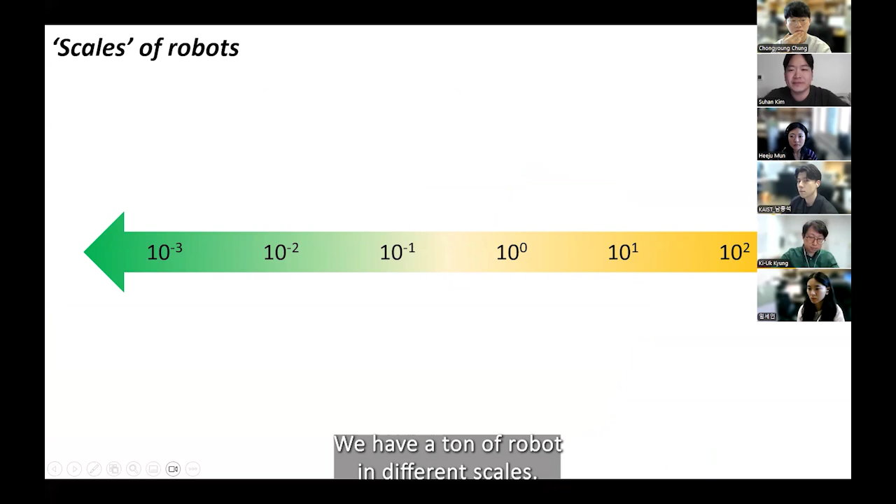I'd like to begin by introducing some different scales of robots. Nowadays, I would say it's like the era of emerging robots, so we have a ton of robots in different scales. For instance, if we see the scale of meters, we can think of robots something like the MIT Cheetah.

The MIT Cheetah robot was developed by Korean professor Sang-bae Kim at MIT, and this is around a one meter robot with four legs that broke the record when it first came out, especially in terms of locomotion speed.

And then if we get to larger sizes, something in the scale of tens of meters, I would say is like airplanes. We don't really usually call them robotic systems, but I think this is a great robot that we use in our daily life, in the length scale of maybe 20 to 40 meters. Since this robot is way larger, it can accommodate way more capacity, especially as a transportation method.

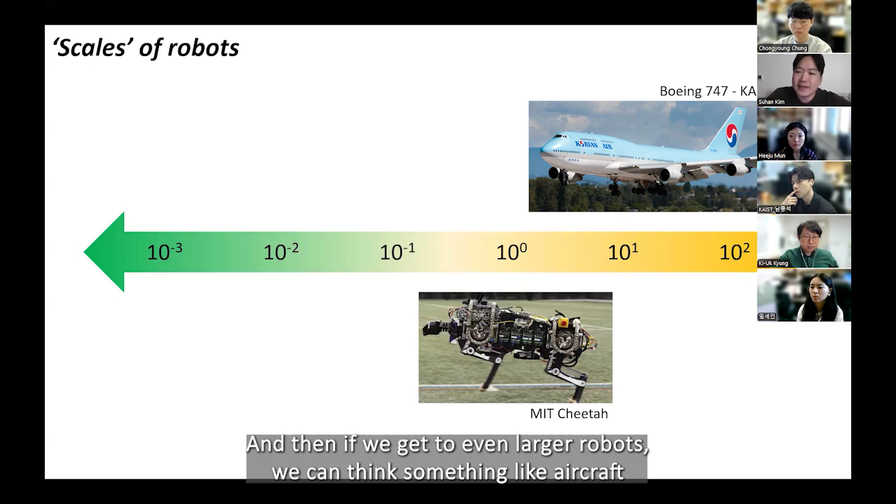And then if we get to even larger robots, we can think of something like aircraft carriers — in Korean, 항공모함. These are even larger, able to accommodate multiple airplanes. So as the size goes larger, basically the force that the robots can generate is way larger, with different use cases.

But on the other hand, I think there are smaller robots that have unique usage compared to the larger robots. For instance, if we get to the order of 10 to the negative one meters, which is 10 centimeters, I want to introduce this robot, the CrazyFly.

I don't know how much you've seen Crazyflies, but a Crazyflie is something around palm-sized, maybe 15 centimeters each. It has a payload capacity of only around 15 grams, and an operation time of maybe around 10 minutes. So way different from our large aircraft.

But since those are very small and lightweight, especially in research labs, they use Crazyflies pretty actively, especially for doing control swarms and flight tests. So as it goes smaller, it has different usage, but also very unique usage that we can't get with larger robots in our lab spaces.

Even smaller, especially at very small scale, I also want to introduce this tiny robot. So right now, let me switch the pointer.

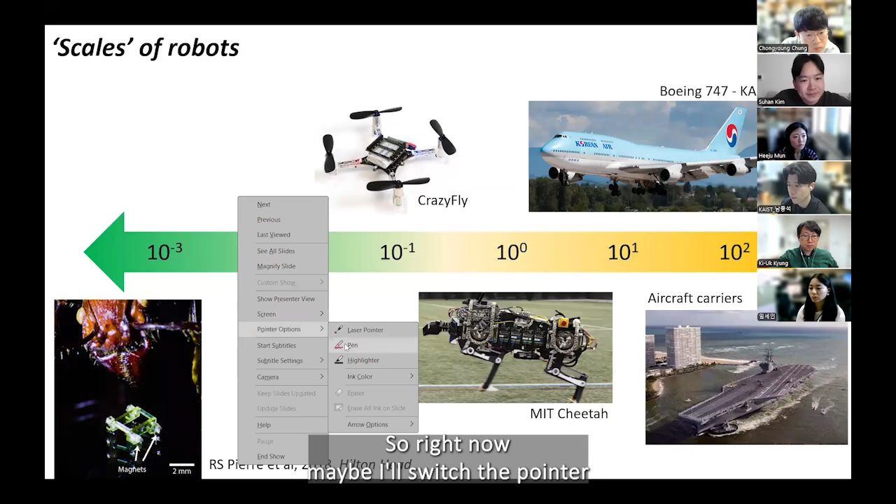So what you see over here is the head of an ant, a little larger ant honestly, but still a head of an ant. Over here is a four-legged robot, actually developed by my master's advisor, Professor Sarah Bergbreiter at Carnegie Mellon University. The way this robot works is that it has magnets on its feet, and we can apply external magnetic fields so that we can operate the magnetic legs. So this is still tiny, but it has four legs, and it can go across very cluttered space, with a potential use case of climbing inside our body.

But of course this is very small, different from the others in the sense that it doesn't have a board, batteries, or any other sensing or control onboard - it's all relying on off-board power and control.

So from my perspective, something in the middle, or a compromise, is something at the centimeter scale. This robot you're seeing right now is called the HAMR robot from Harvard, specifically Professor Robert Wood's lab. This robot, just like the Cheetah, has four legs, each with 2 degrees of freedom, and they all have controllability with control boards, batteries, and everything onboard. If you reference the coins, it's around 2 to 3 coin sizes, maybe around 5 centimeters.

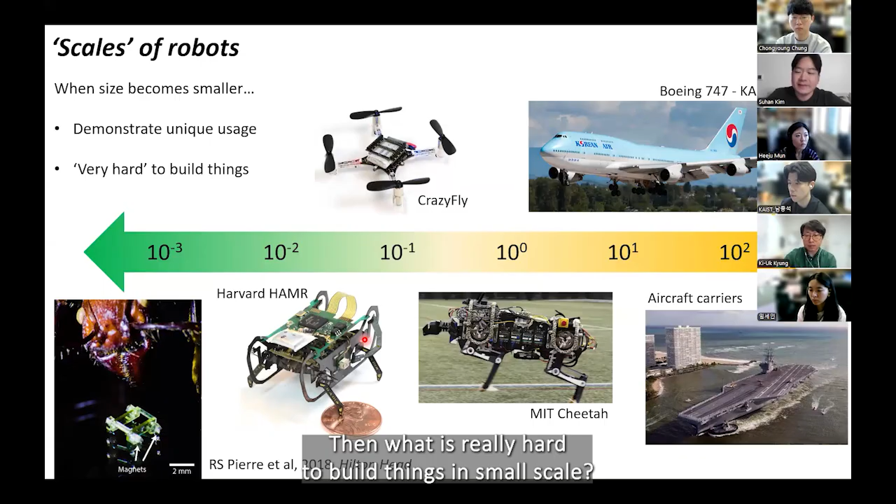So obviously we have to make the system much simpler. But on top of these practical issues, there's some underlying physics that indicates physics changes with the size of the robots. So I'll take the example of drones, as we're making flying robots.

Say if you want to size down the drone by 10 times or 100 times, with characteristic length L, let's see what happens. First, I want to look at body weight. If we assume the density is roughly similar, as a rough scaling, the weight scales by L to the cubic, obviously.

But one important component of robots are joints, and joint friction - say if we have lubrication friction - usually scales by L squared. So what we can calculate is that if we divide joint friction by weight, the friction-to-weight ratio scales by L to the negative 1.

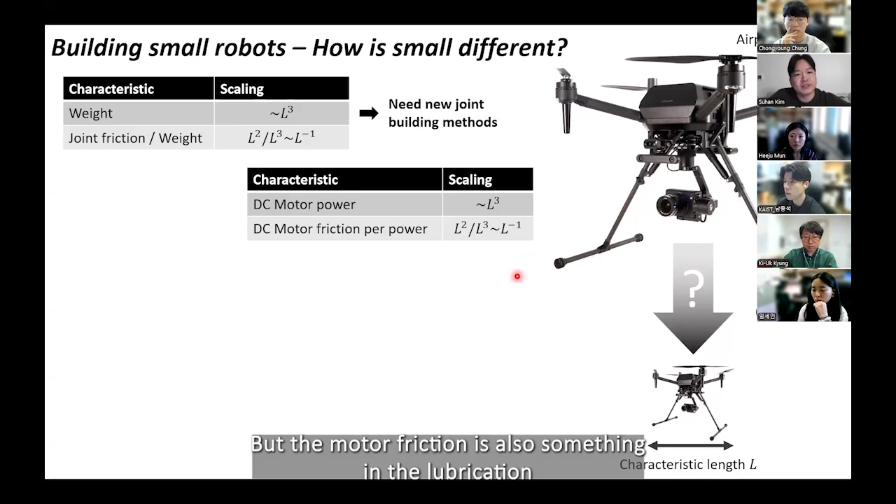We can do a similar thing with the actuators, especially the electromagnetic motors we're using. Motor power also scales by L cubed, but motor friction is in the lubrication friction area, which scales by L squared. So for DC motors, motor efficiency drops a lot as the motor size goes down, and that's partially why we can't use motors for smaller drones. This means that to make a smaller system, we'll need some different power density mechanism other than motors.

Another part is controls. If we roughly scale the robot's inertia, which is m times r squared, it scales by L to the order of 5. Whereas body torque, roughly scaled as mg times r, scales by L to the order of 4. Rotational acceleration scales by L to the negative 1, meaning that as size goes down, rotational acceleration is much faster, which is pretty apparent. That means we'll need a much faster control system as well.

In fact, our robot right now uses kilohertz-level control. Other things like computation and battery power and capacity become much more limited, whereas position sensing error relative to size goes larger. All of this suggests that the system side is pretty much limited in making a small system at this point.

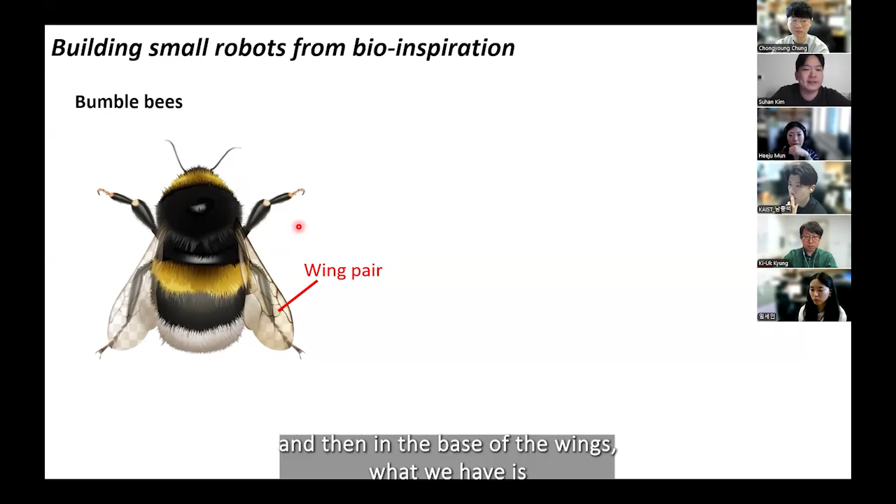If we take bumblebees and view them as robotic systems, we can observe that first, it has a pair of wings. At the base of the wings, it has all the flight muscles and joints. And of course, it has all the sensing and computation on its body, and energy storage in its body. The bumblebee weighs around 120 milligrams, and the wing beat is typically around 200 hertz.

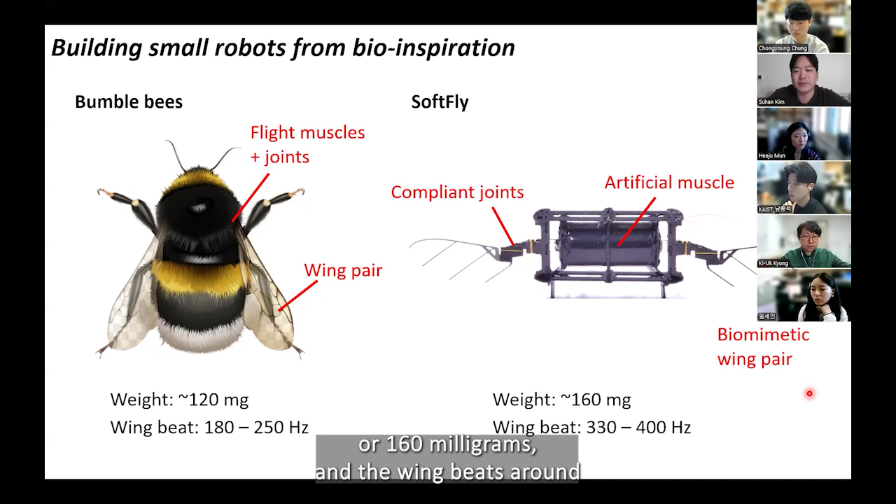The robot we're building has a pretty similar structure, where we have a pair of biomimetic wings, and artificial muscle in the middle, which is DEA, something you're probably familiar with from the lab. We also have compliant joint systems, different from friction-based joints, which can be very efficient at small scales. Our robot right now weighs around 0.16 grams, or 160 milligrams, and the wing beats around 300 to 400 hertz.

The second system is we have a compliant hinge structure at the base of the wing. This hinge structure's stiffness plus the wing's inertia gives it its own natural frequency of flapping. So during the rotation of the wing, we also get a flapping motion, which generates the thrust. We have two degrees of freedom in the system, but since we can put this resonance mode into the same frequency, we can achieve both motions with only one actuation. So I'd say this is a very efficient system design.

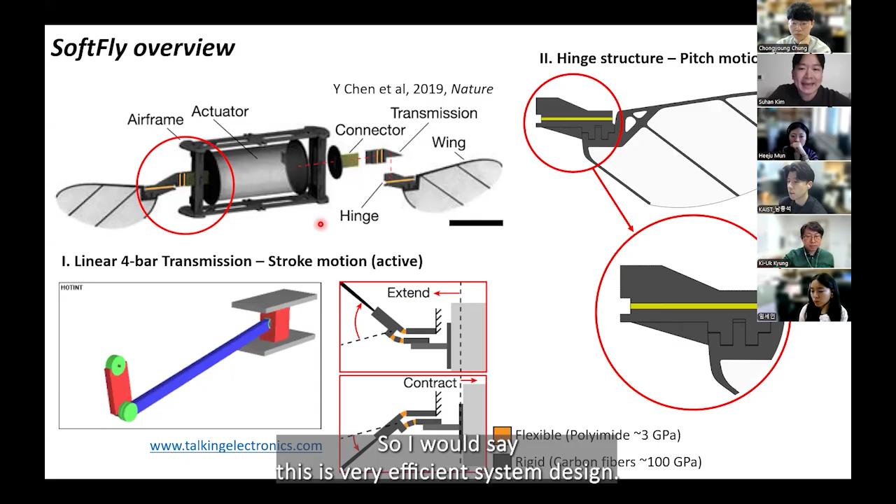This is how our robot moves. You can see our DEA actuator in the center moves linearly, and then the joint converts this linear motion into rotation. You can also see the wing is not fixed, but it's flapping through the rotating motion.

Right now, what you can think is that the robot is generating thrust behind the screen, like doing a fanning motion, towards behind the screen.

Right now, the operating condition is about 1.4 to 2 kilovolts, and around 400 hertz. Typically, if I introduce this voltage, it's very astonishing to normal researchers, but since you're all familiar with DEAs, it's pretty typical in the DEA field, I guess.

If you take a look from the sideways, it looks like this, just what we intended. This is something like ideal motion from the sideways, and right now it's generating thrust downwards.

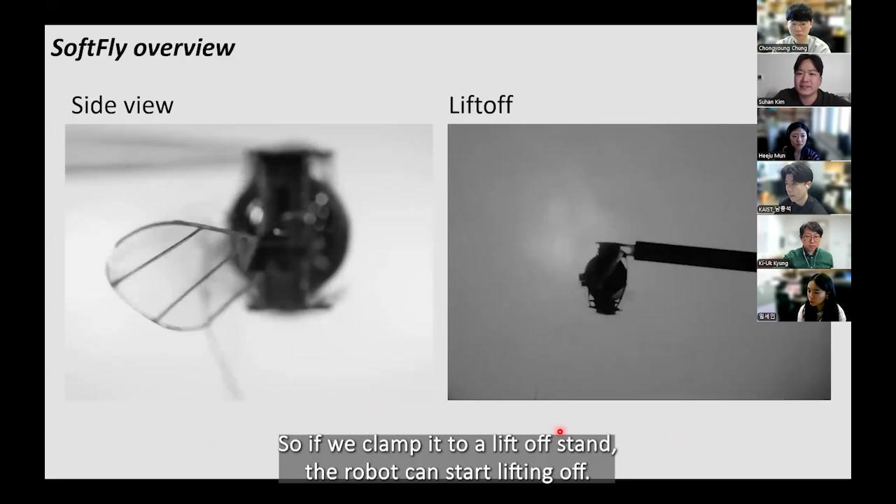If we clamp it to a lift-off stand, the robot can start lifting off. Right now, this actuator with a pair of wings, you can think of it as a motor with a propeller.

What we really need is to put four of them together to make a quadrilateral shape to achieve controlled flight. Right now, this is the full robot with four units.

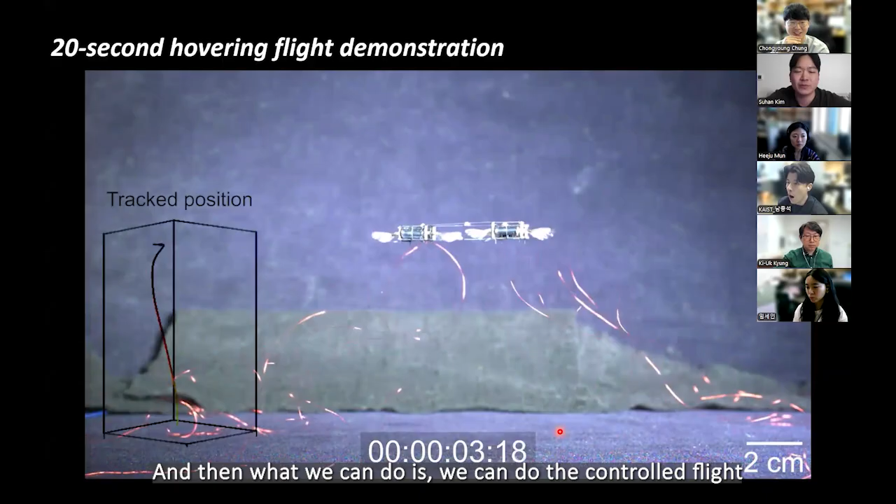What we can do is controlled flight. This is called hovering flight with a set point. This is the golden standard for flying, because if we can do hovering, that means we can move anywhere we want from the flying robot's perspective.

I'd like to go a little deeper into our system. This is our robot on the right side, and we actually have motion capture markers. Due to these markers, our robot's 3D position and orientation can be captured by this Vicon motion capture system.

What we actually do is we have an off-board outside computer that runs all the control loop, and then the control signal feeds into the robot through high voltage amplifiers. So I'd say our robot right now is doing off-board sensing, off-board control, and off-board power.

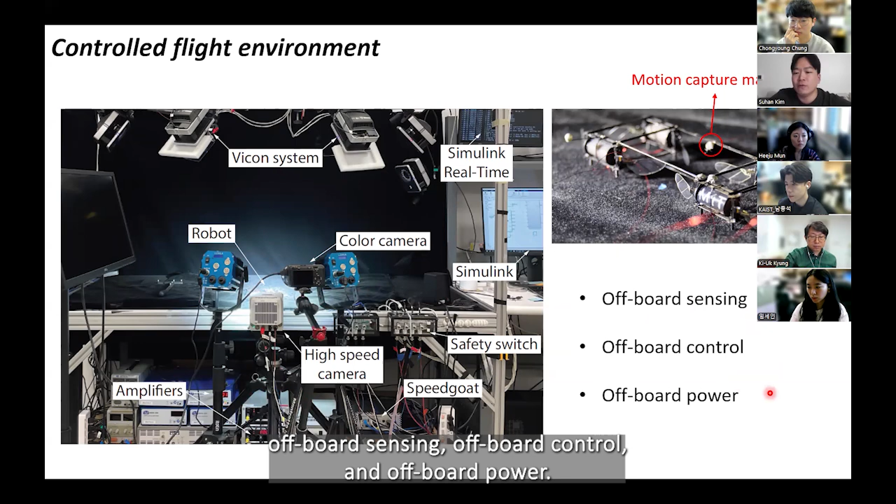The goal for our lab is to work on all different aspects of our robot: structure, material, actuator, power system, and controls, plus battery, so that we can make our system something like commercial drones, meaning everything on board—sensing, computation, and power systems.

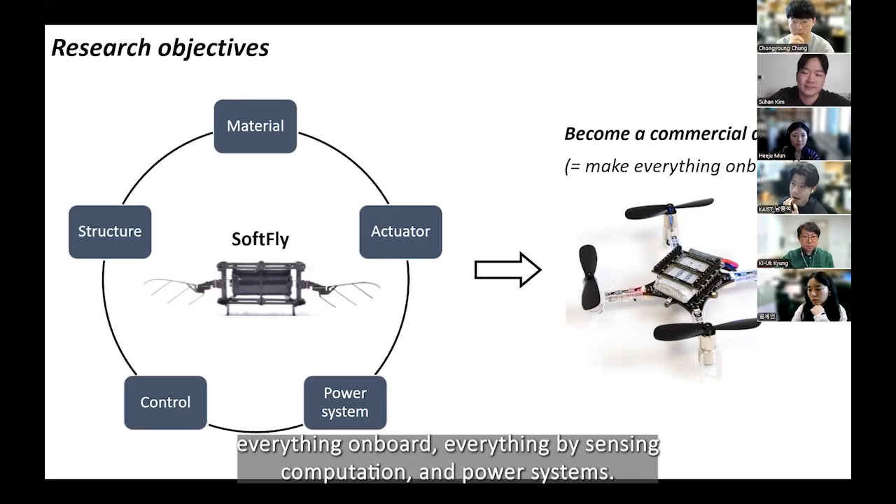I'd like to discuss two features of our robots. The first thing is powerful and soft artificial muscle, basically DEAs, and the second thing is flapping wing structure design. Let me start with the artificial muscles.

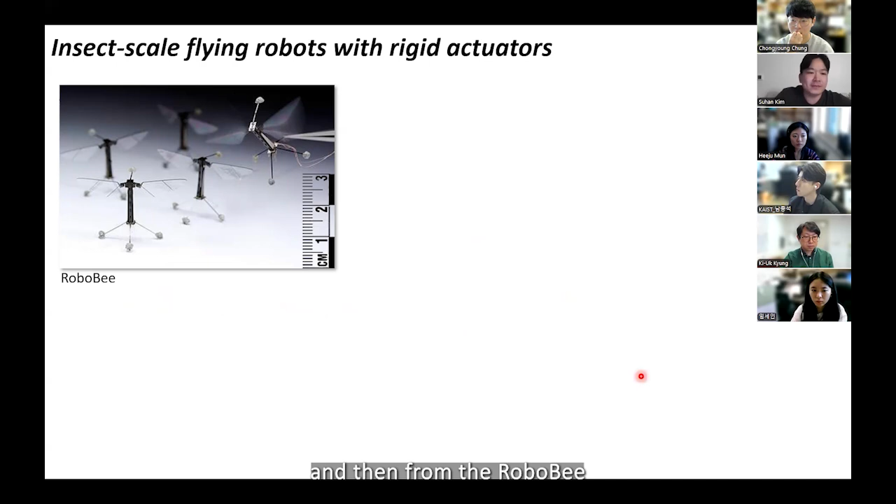This flying robot design is not something we invented first; this research has been going on for about 20 years so far, and the most breakthrough robot I'd say is RoboBee from Harvard, especially from Professor Robert Wood's lab. From RoboBee, there are all different types of designs which use different structures or different power systems, but the common theme for them was that they use so-called piezoelectric actuators.

Piezoelectric material is a material that, if it gets voltage applied, it expands. So what they can do is make two layers of piezoelectric actuators.

So if you apply voltage to the upper ones, it bends downwards, and if you apply voltage to the lower one, it bends upwards. So this is called a bimorph style actuator.

But there was some issue with this, especially that piezo actuators were rigid. It was very lightweight and efficient, so it can support light flying robot systems, but it actually had the issue of being too fragile. If the robot collides with anything, the actuator breaks. So it really limited the space of design configurations, design trials, or control trials. So what we ended up needing is a new actuation mechanism that can be more robust than piezoelectric actuators.

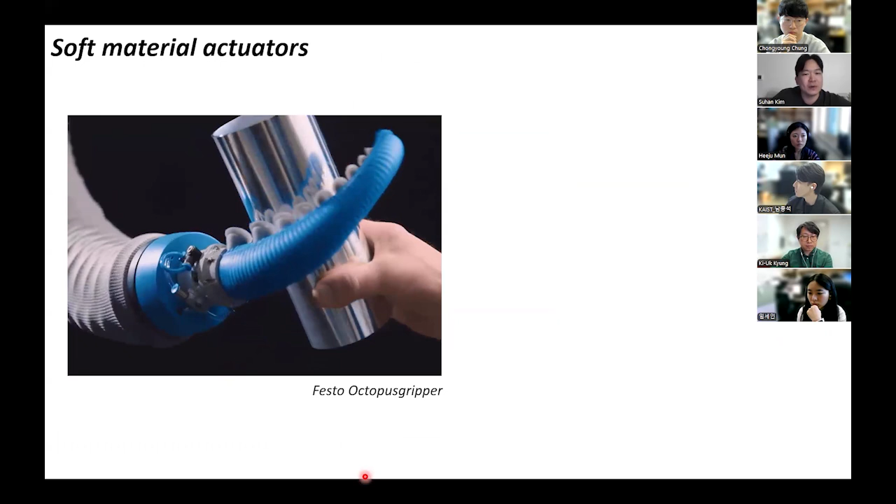So what came into our mind is that we came to soft material actuators, which can be very delicate but still very robust in this context. Soft actuators sometimes demonstrate huge resilience toward damage, which is really promising compared to piezoelectric actuators.

What we need from those soft actuators, especially if we want to use them for flight muscles, I think there are three main requirements. One is to be compact, because we are making small robots. The second is to be power dense, meaning it's not only has to be powerful, but also lightweight enough to support its own weight by generating thrust. And the flapping is pretty high bandwidth motion, so the actuator itself has to be high bandwidth as well.

If you roughly lay out all different types of transduction like thermal, pneumatic, magnetic, chemical, and electrical, we can briefly think electrical fits pretty well among all those functional requirements.

This will be very familiar to all your lab members. We use a dielectric elastomer actuator structure, which uses an elastomer sandwiched by two electrodes. There are a ton of DEA studies so far, which sometimes use contraction in the vertical way, sometimes use stretch in the lateral direction. For us, we especially use this rolled up structure into a cylinder shape.

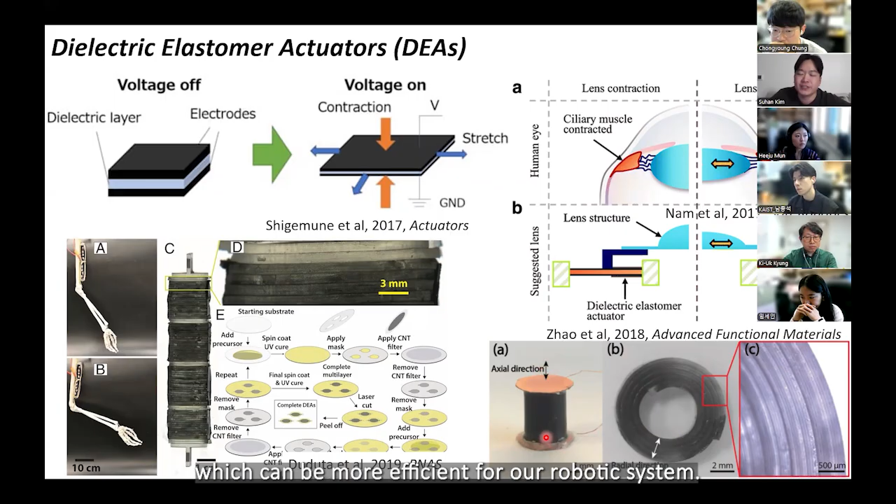I think the beauty of this rolled up structure is that by rolling the actuator, it constrains a bit of the radial motion so that we can concentrate the motion into the axial direction, which can be more efficient for our robotic system.

Some properties of DEAs, I think familiar to your lab too: due to our elastomer, our actuator itself has pretty high natural frequency, especially in this structure, having around 500 hertz. And if we measure block force, we have around 0.35 newtons of block force.

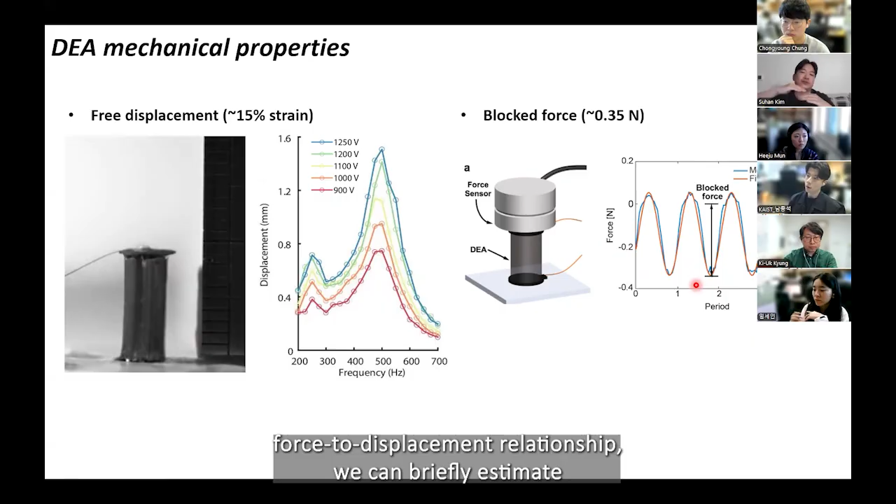So if we assume a linear force-to-displacement relationship, we can briefly estimate the power density of our actuator to be 640 watts per kilogram. Sometimes I explain this number as: 1 horsepower is 750 watts, meaning horses generate 750 watts with a body weight of around 300 kilograms. So you can briefly imagine our actuator being around 300 times more efficient than horses—well, it's not as powerful as horses, but it's actually 300 times more power dense than horses.

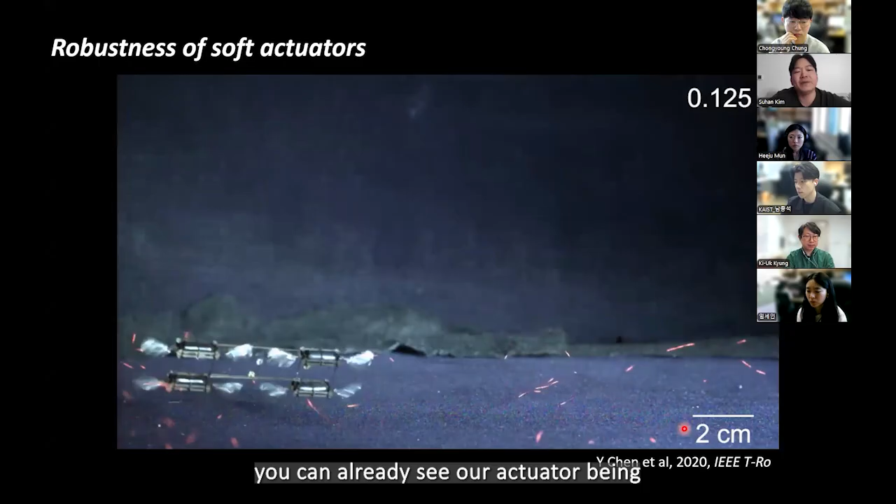From our previous results, you can also already see our actuator being very, very resilient to contact, which is a very distinguished, unique property compared to previous piezo-driven actuators.

For us, there are multiple compliant electrode material candidates, and we are using carbon nanotubes. For the elastomer, we are using Elastosil P7670 elastomer due to its dielectric strength and frequency behavior.

One important aspect of the structure is that we are using high electric field, which makes our life a little not easy. What is really hard is that we are using a high electric field of 60 volts per micron, which ends up being around 2 kilovolts of voltage requirement.

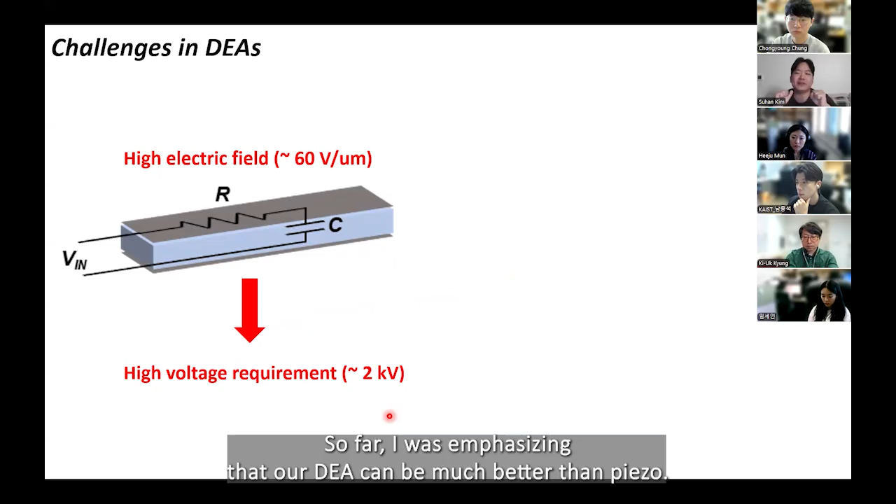So far I was emphasizing that our DEA can be much better than piezo, but if you start looking into electrical properties, it's not true anymore. If you look at the operation voltage, our DEA actually uses almost 10 times higher voltage, and power consumption is also way higher, whereas efficiency is not so much higher. So mechanically, these are very promising, but electrically, there's still a huge gap between electric DEA and piezoelectric actuators.

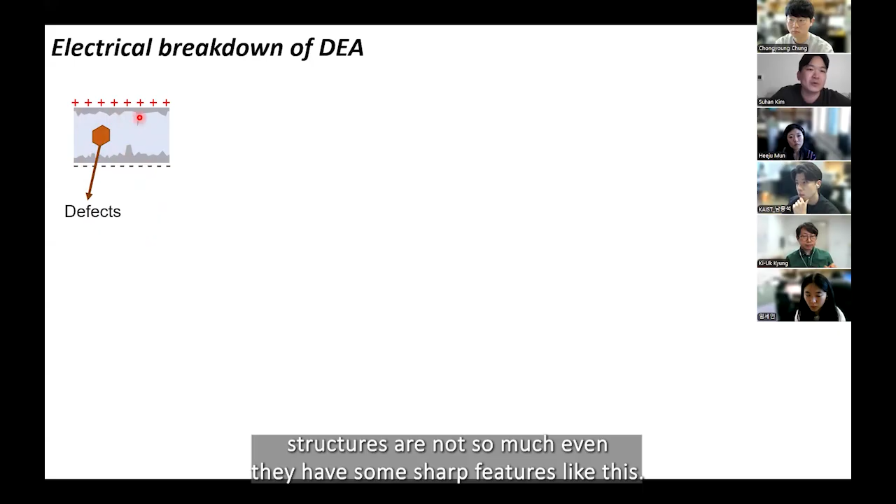The other thing is breakdown. So this is the cross-section illustration of our DEAs. Since we are not making everything in a clean room, and even when we do, it's kind of unavoidable to have some defects inside our DEAs. And since we are using CNTs, the microscopic structures are not so even. They have some sharp features like this.

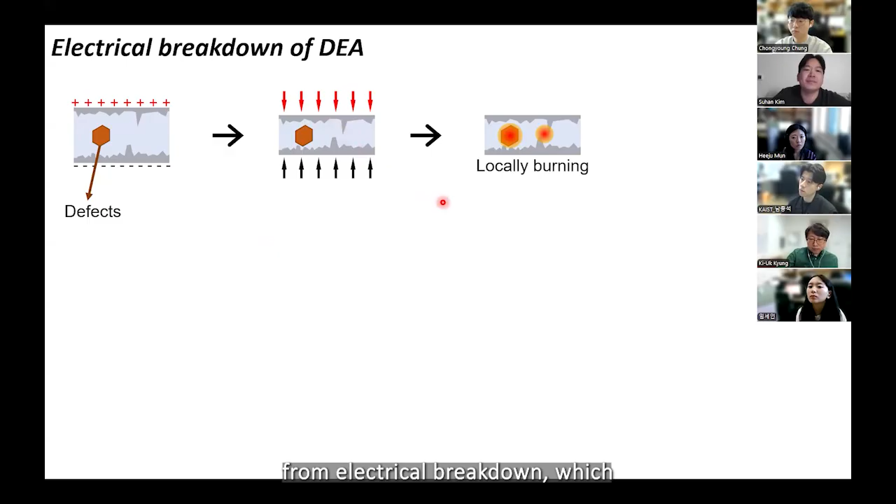So if we start applying voltage, what actually happens is that the electric field is not identical among the surface, and those surfaces suffer from electrical breakdown, which ends up being the shorted path between those two layers.

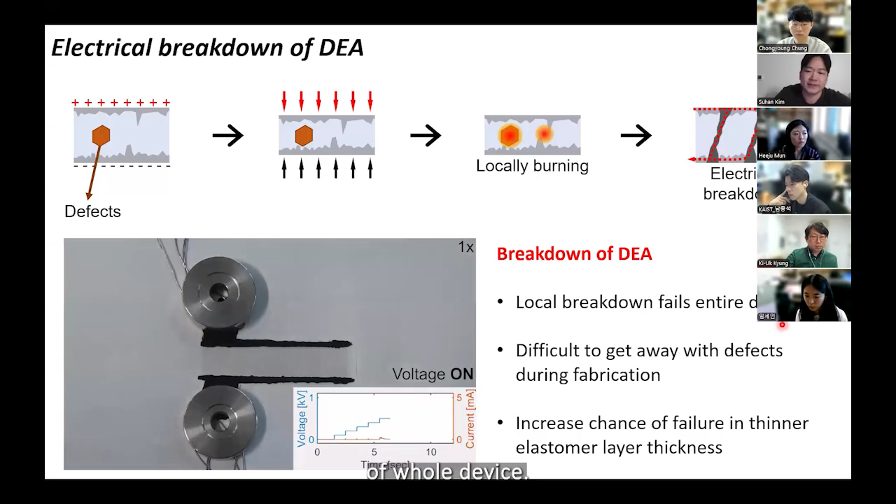So our roadmap for addressing those issues is that we first optimize the DEA material and fabrication so that we can make our actuator breakdown resilient. After we obtain this breakdown resilience, we fabricate the DEA with much thinner elastomer layer thickness, which can ultimately reduce our operation voltage of our DEAs.

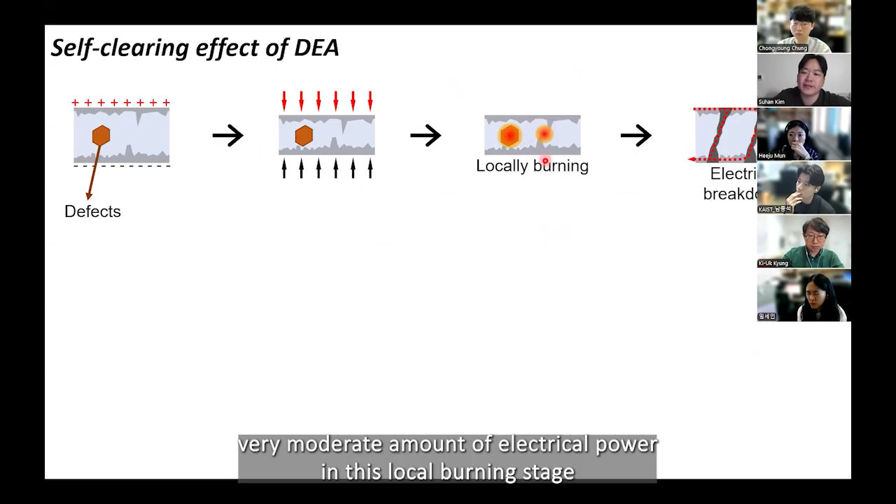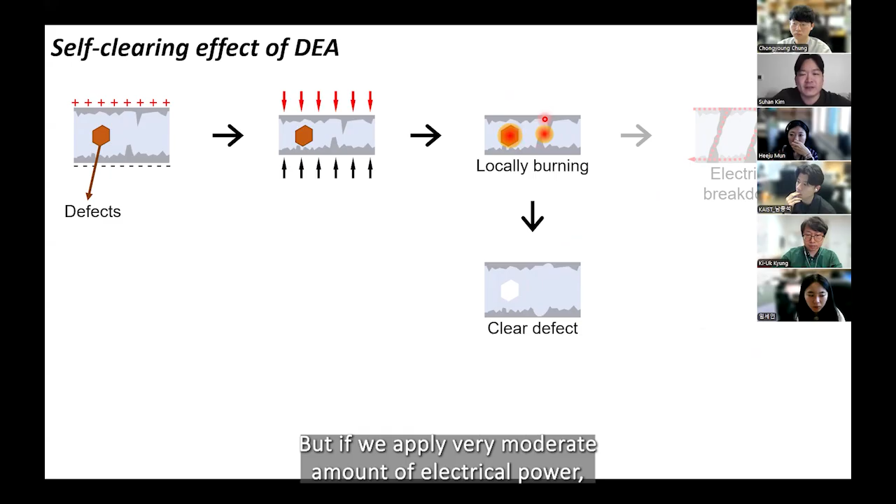So to be specific, what we find is that we focus a lot on this local burning part, especially that if we apply a very moderate amount of electrical power in this local burning stage, what we can do is instead of going to electrical breakdown, we can actually isolate that area from the others due to the disconnection of CNTs. Basically, you can think of CNTs as a bunch of rods connecting to each other, but if we apply a very moderate amount of electrical power, they disconnect that local part from the other so that the other part can still be functional.

So what is important for self-clearing is that we have to maintain the quality of the elastomer as much as we can, of course. And what we're finding is the concentration of CNTs, the amount of CNT we are using for the electrode, is very important. And then the power input at the burning point is also important.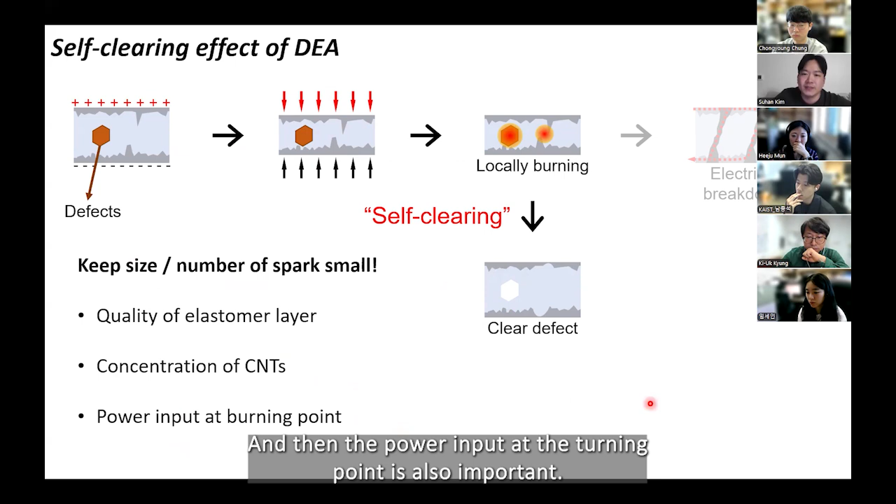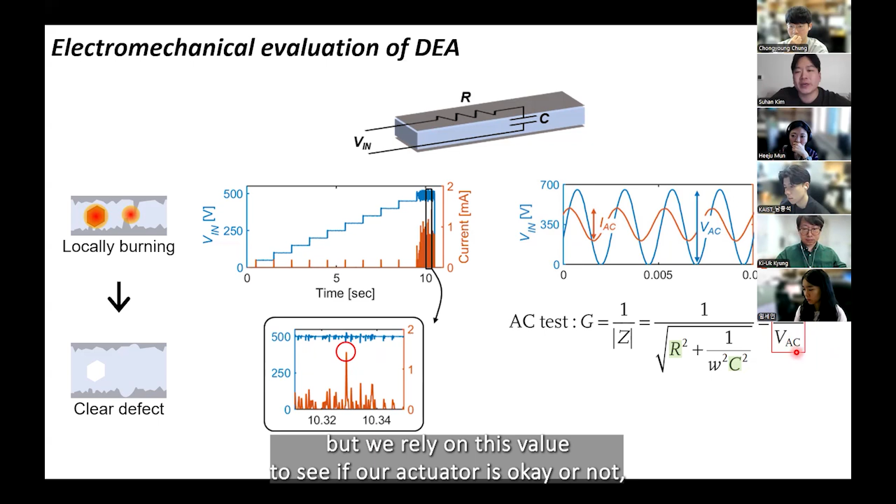And at the end, what we actually do is apply AC voltage. So if we apply AC voltage and then measure this voltage relative to the current, this IAC over VAC value indicates R and C of the system, which indicates the status of basically our electrode. It's very hard for us to observe the electrode directly, but we rely on this value to see if our actuator is okay or not, especially when we go to higher electric fields.

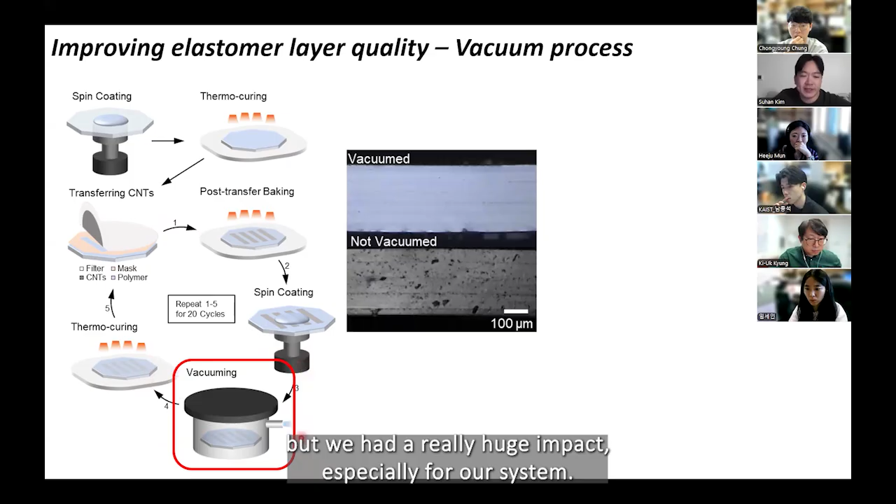What we first find is that doing a vacuum seems to be a pretty simple process, but it had a really huge impact, especially for our system. As I mentioned, if we monitor this IAC over VAC value by applying higher and higher voltage, what we find is that the sample without vacuum drops this value pretty quickly, whereas the sample with the vacuum process maintains its IAC over VAC base value toward higher electric fields.

So obviously, if we don't do the vacuum process, we can't really get to a max lift condition. And then the second thing I mentioned before is the amount of CNT we're using.

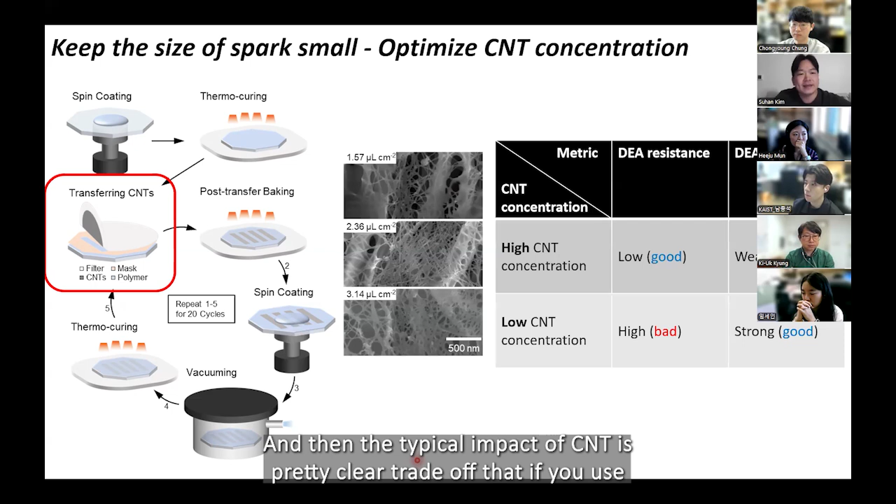This is a SEM image of all different CNT concentrations. The typical impact of CNT is a pretty clear trade-off: if we use more and more CNTs, it's better for good conductivity or low resistance, but if we use more CNT, it's hard to isolate itself from the defect areas. It's pretty apparent that if we have more CNTs, it's harder to isolate.

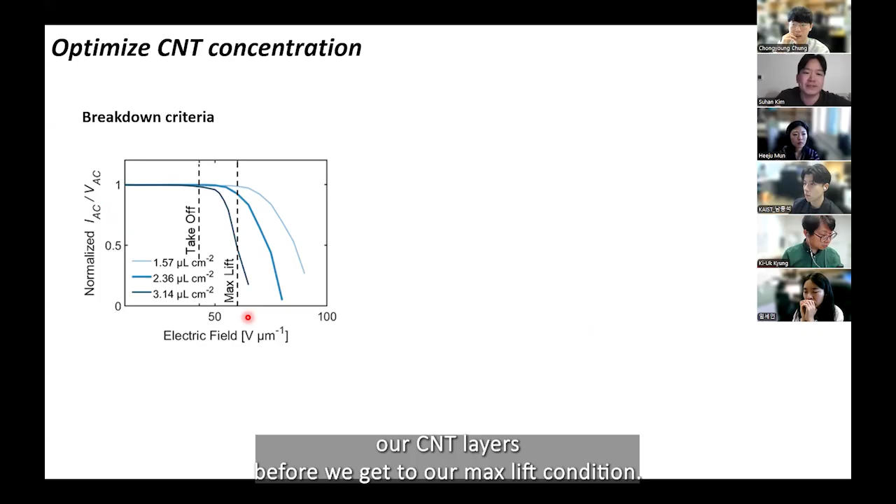On the other hand, from our RC model, we can define the minimum conductivity, or maximum resistance, we can afford to get our desired flapping motion. This sets our minimum CNT we can use. So from those two criteria, we determine our optimal CNT concentration.

After doing this, we started making the elastomer layer thickness thinner and thinner, by spin coating faster and faster. We reduced the elastomer thickness from 335 micrometers to 10 micrometers, which let us reduce the voltage from 2 kilovolts to 500 volts, while still maintaining endurance over 2 million cycles.

You might still think 500 volts is high, but we actually demonstrated that 500 volts is something we can afford with this 0.1 gram circuit. So this opened up the domain where we can actually try power autonomy for our robot.

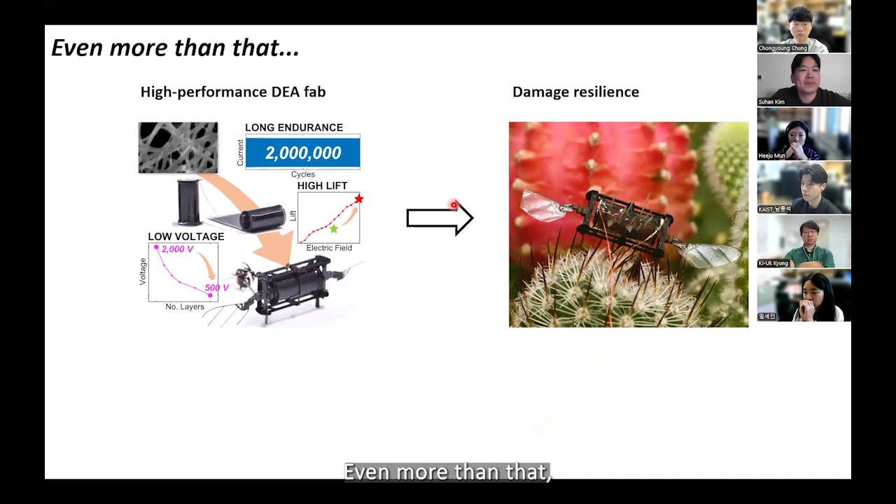So even more than that, from this high performance fabrication of actuators, we want even more successful demonstrations, such as damage resilience. Several questions we can ask: will the robot be able to fly with severe actuator damage? If damage has already occurred, can we repair it? Is the actuator robust enough to withstand structural damage, like the wing damage you're seeing in the photo?

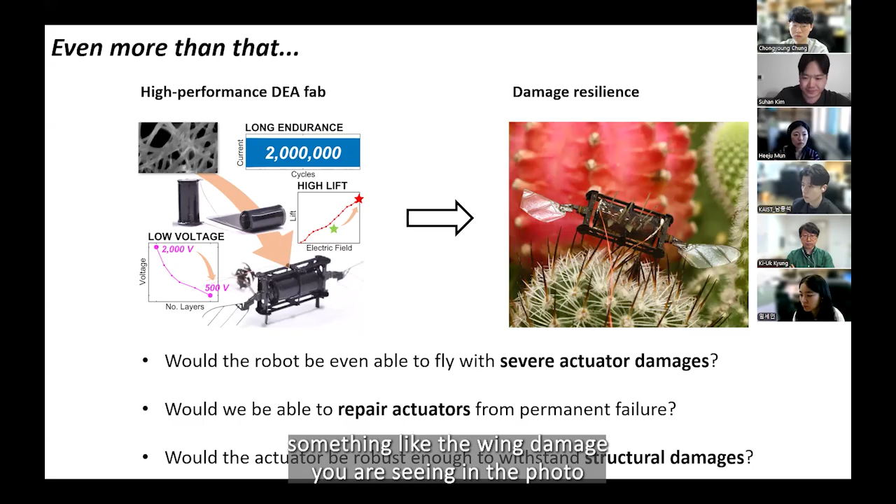Our finding is that, if you take a look at our self-clearing process, basically if there's local burning, we can isolate it from the rest of the CNT network. And our finding is that this is actually applicable to external damage, like piercing damage. So if we have piercing damage across our DEA, what actually happens is that if we apply a moderate amount of electrical power, we can isolate that piercing from the surrounding CNT networks.

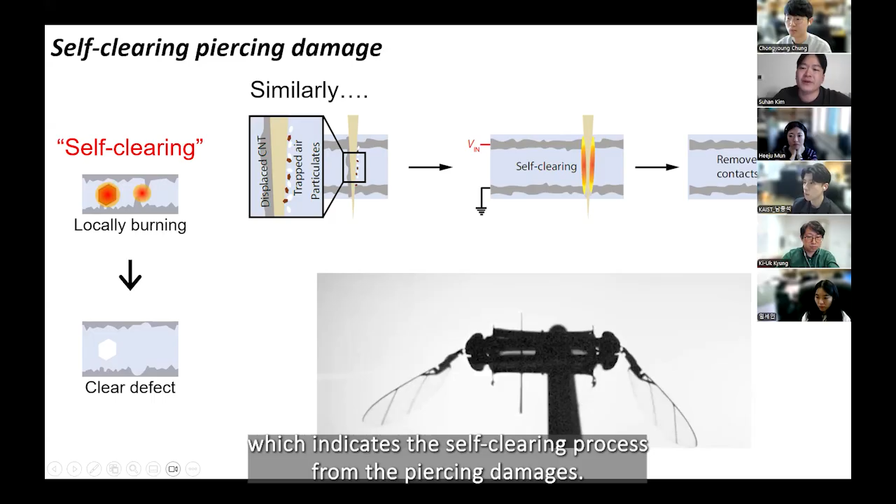If you see the video here, you can see local burning happening where the needle is piercing the DEA, but it instantly goes off, which indicates the self-clearing process from the piercing damage. So even more so, what we can do is pierce more and more needles.

This is piercing by 10 needles. The reason we stopped at 10 needles is that there was no more space to put the needles. You can also see it's withstanding the wing damage, which indicates that the DEA is resilient enough to withstand asymmetric aerodynamic loading on different sides.

And this was even able to lift off. So basically the DEA is maintaining the power density needed to support flight.

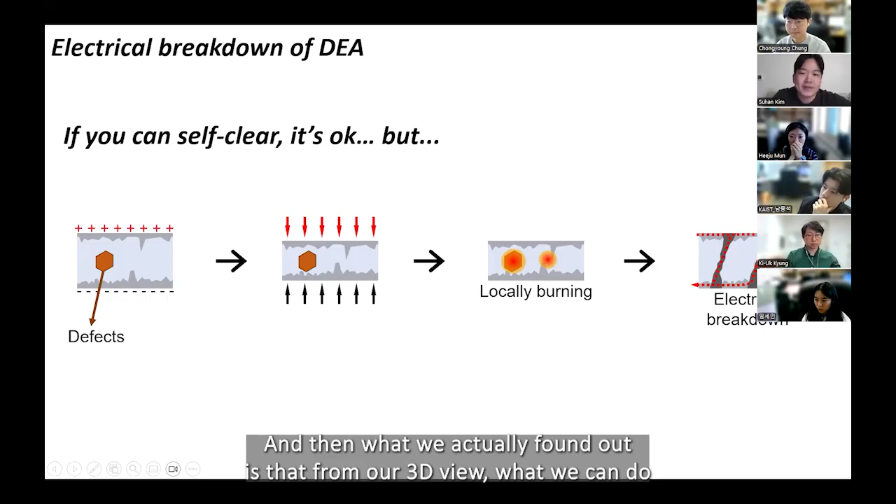The other thing we demonstrated is that sometimes the DEA has already suffered a breakdown. What we actually found out is that from our 3D view, we can isolate that area using UV lasers.

So here, we actually isolate this area using the UV laser. What happens is that the laser penetrates through the elastomer, because the elastomer is relatively transparent, whereas it locally degrades the CNTs.

If you see the proper case scenario, you can see there's a lighter region from the CNTs, where the CNTs aren't fully gone but are still degraded. The next step is we can apply high voltage so that we can clear out that degraded area of CNTs, which will ultimately isolate the defect.

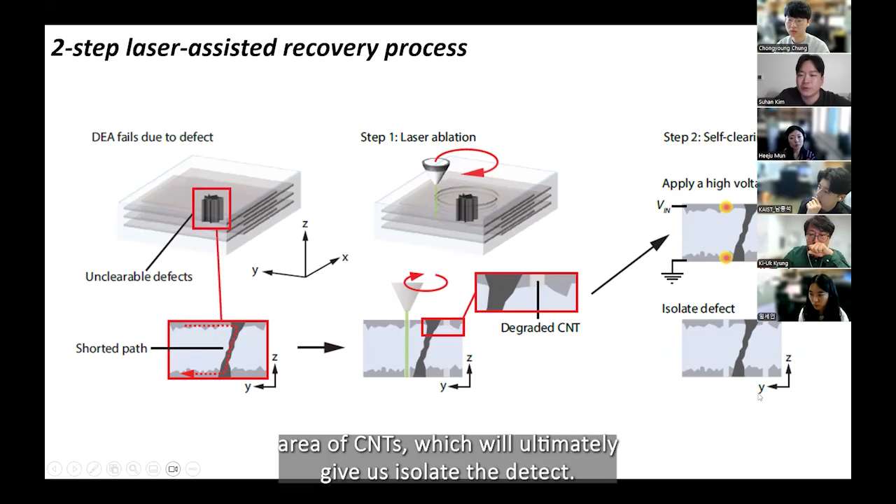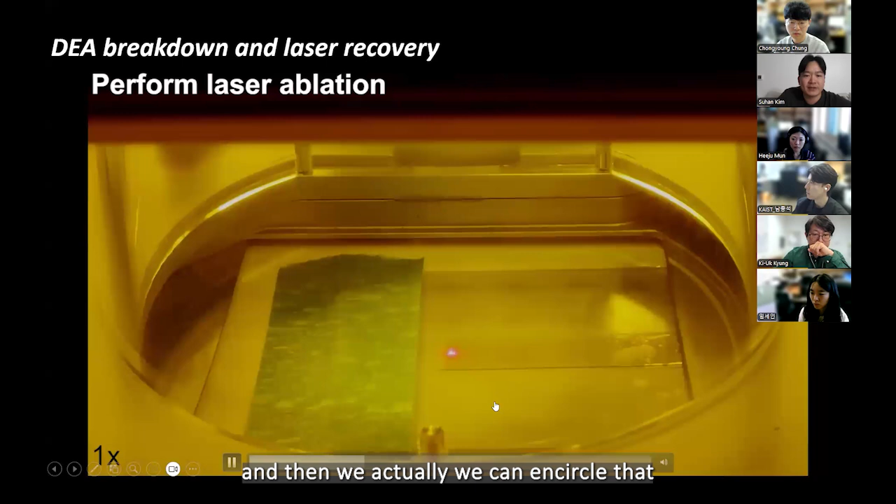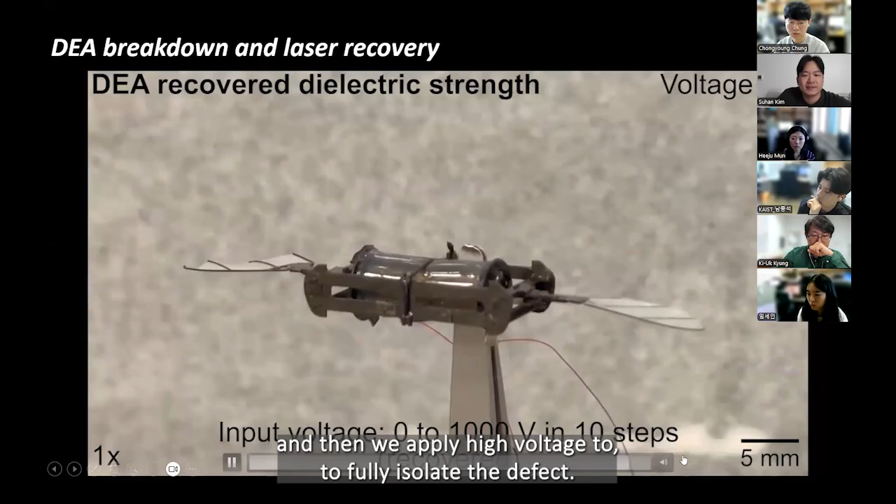So what actually happens is that if there's some failure inside our robot, we can take out the DEAs. We're doing rolled-up DEAs, so we have to unroll them, which is a bit of a manual process. Then we put it into the laser and encircle the defect area, which you can see here, then roll it back and put it into the robot. We apply high voltage to fully isolate the defect, and at the end you can see the robot flapping, so it basically recovers its flapping functionality.

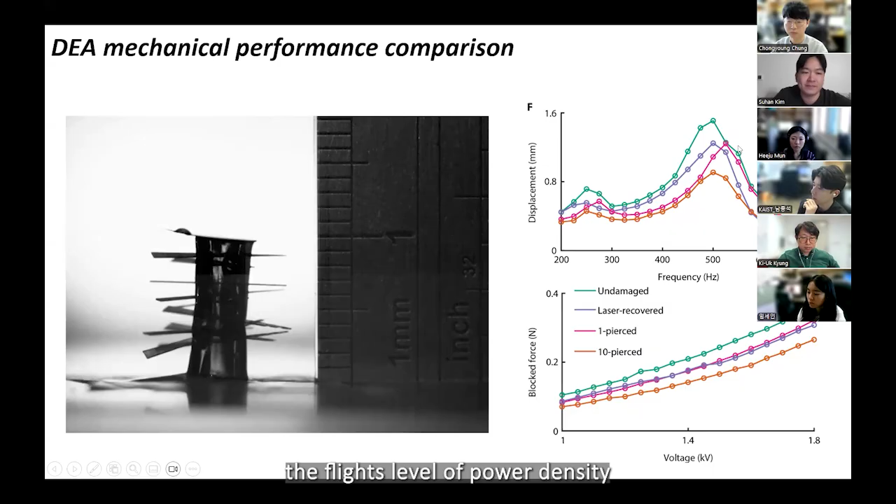So this is the characterization, which suggests that there is a degradation from putting needles in, but it can still afford flight-level power density.

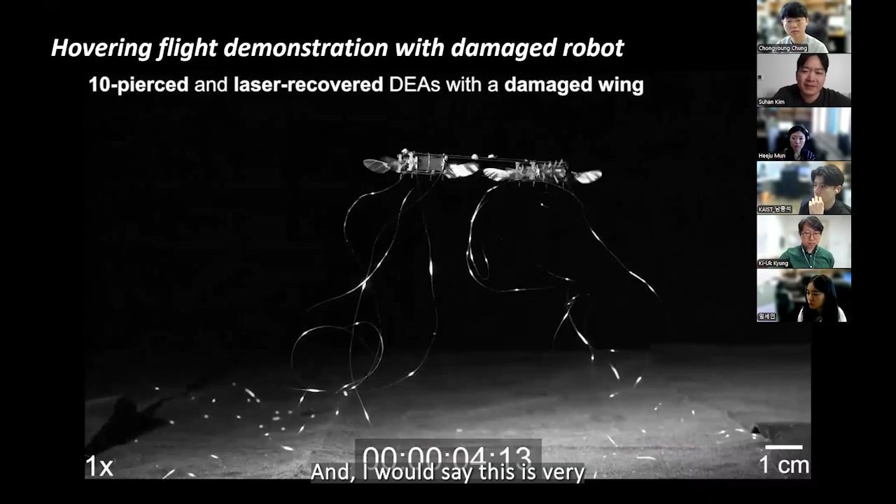We finally constructed a robot with four units which suffered different kinds of damage. This one suffered from 10 piercings with a damaged wing, and this one suffered laser recovery. At the end, we put all of them together in the same robot, and you can see this robot is still capable of hovering flight. I'd say this is very unique compared to commercial rigid-type actuators—even with electromagnetic motors, you can't really imagine a motor getting pierced but still being operational.

I'd like to move on to the second part, switching gears a little, which is flapping wing structure design.

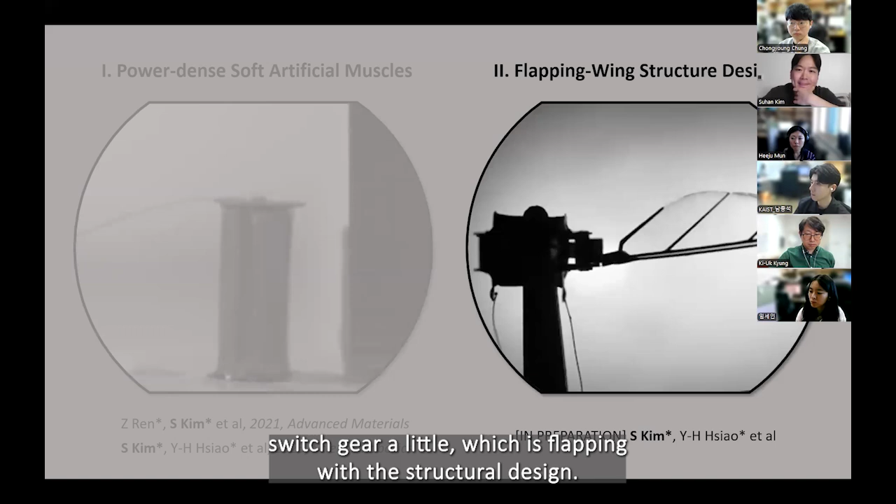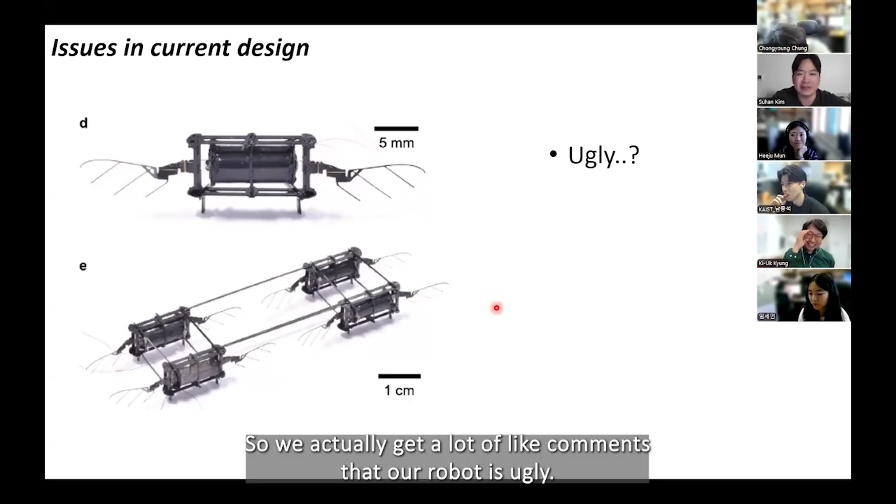More practically, we had inefficiency, especially in the inner wings—the wings are too close to each other, so they have aerodynamic interference, which ultimately reduces the total lift we can generate. The other issue is compactness: if we want to make our robot fully autonomous, which needs a board and batteries, we can't really utilize this space, which is ultimately a problem.

There's also the lifetime issue. The longest this robot was able to fly was only 40 seconds. Some parts were breaking, especially the wings, pretty often. If one wing breaks, we repair it, and then after flying 10 seconds the other wing breaks. So those are all the issues our previous robot had.

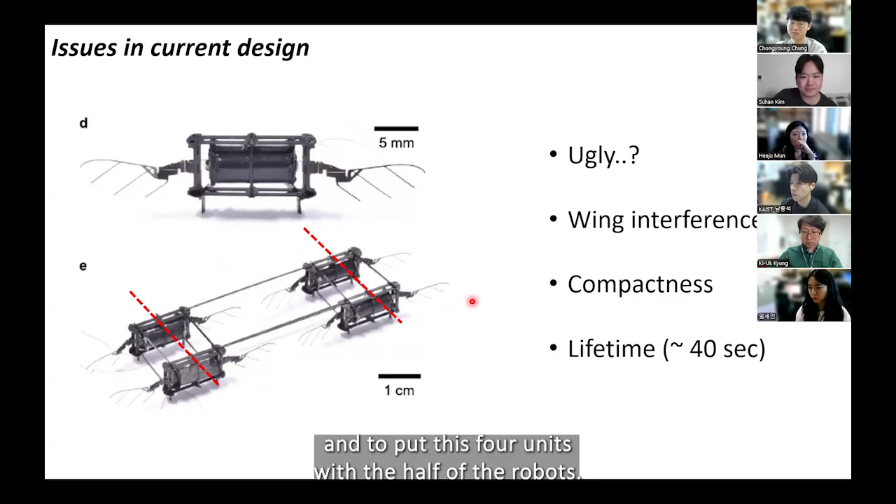So the solution we came up with is simply to cut the robot in half, throw out all the inner parts, and put 4 units together using halves of the robot. The plan is to make it into half, ground the robot from the half, and then put 4 of them together to make a quadrilateral shape.

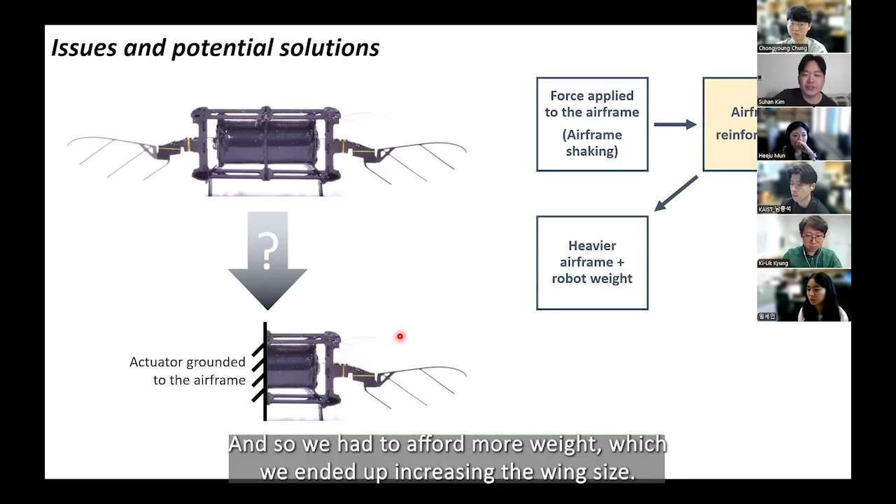But this looks pretty simple—it was actually not as simple as we thought in the beginning. Some issues occurred because the previous structure had the actuator suspended by transmission, whereas in this structure the actuator applies force directly to the airframe. So the airframe started to shake a lot. We had to reinforce the airframe, which made it heavier. We had to afford more weight, which ended up increasing the wing size. Some other factors, like the transmission, suffered from off-axis motions, so we added guiding structures.

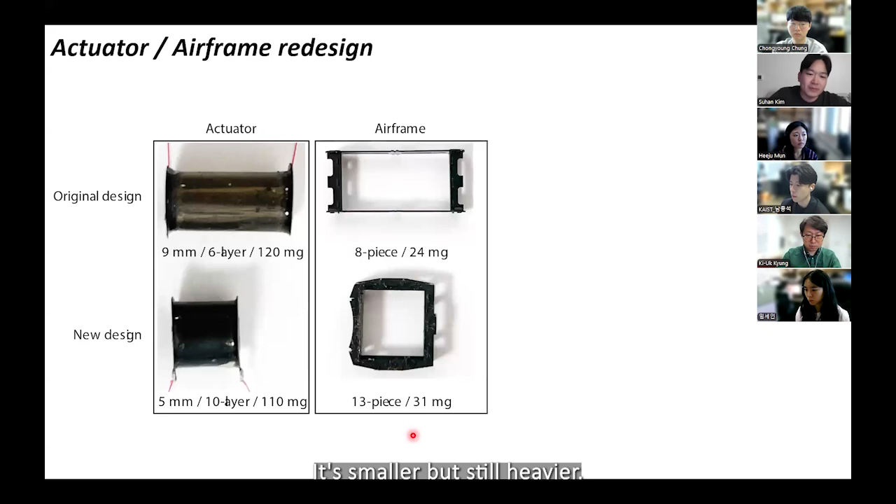So the top parts are the previous robot, and the bottom parts are the new design. You can see the actuator length got cut in half, but we still needed larger force, so instead of using 6 layers, our new actuator uses 10 layers, which can produce more force. You can see the airframe was reinforced a lot—it's smaller but still heavier. This airframe is a 13-piece assembly with an I-beam structure so it can be very resilient to oscillations. The main problem of our robot was actually the wing hinge.

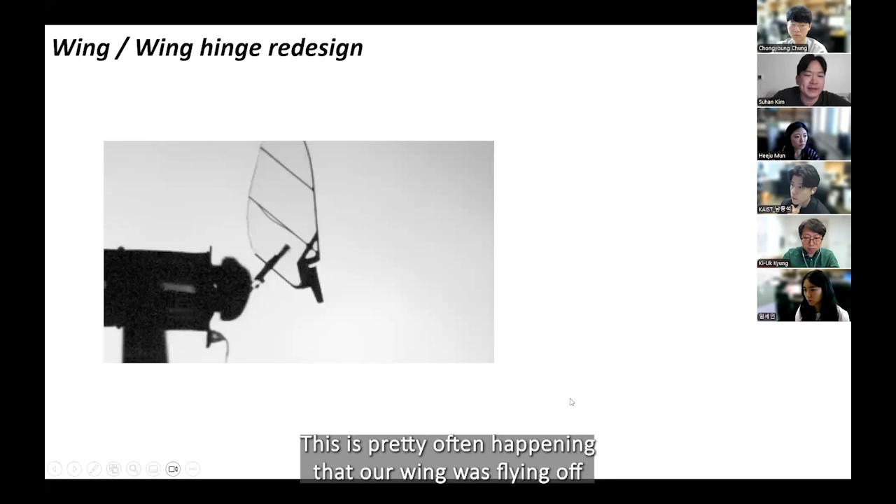So this is the flapping motion where the wing hinge has failed. You can see this is pretty often happening, that our wing was flying off during our flapping kinematics trial. This is even worse if we observe it during flight. This is hovering flight and the wing goes off and the robot really crashes to the bottom, which is very scary, especially if you want to write a paper with this robot. It's very, very scary scenario.

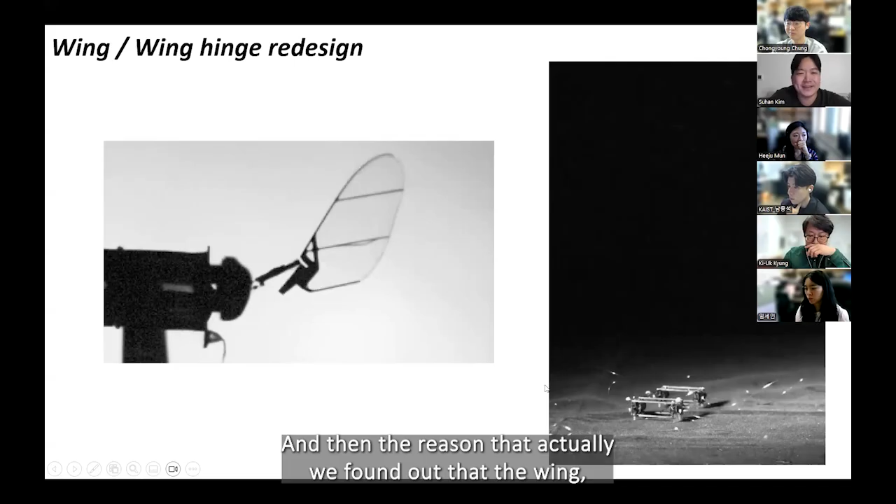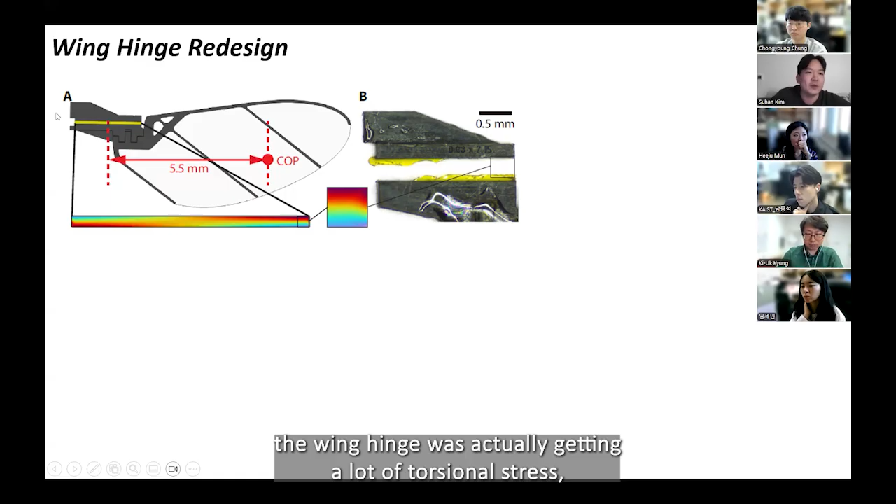The reason we found out that this wing hinge breaks a lot was that the center of pressure on the wing was getting the pressure pretty off from this wing hinge location. So the wing hinge is from here to here, but since the center of pressure is off axis by 5.5 millimeters, the wing hinge was actually getting a lot of torsional stress, which ended up giving stress concentration in 2 corners. So we changed the wing design so that it can be a little larger, and elongated the wing hinge along the edge so that the center of the wing hinge and the center of pressure can be aligned pretty well.

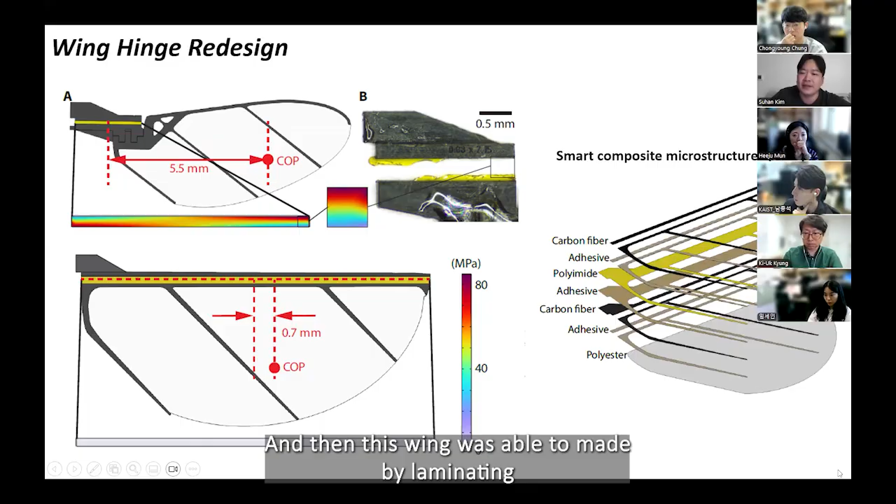Due to our COMSOL simulation, the stress concentration has dropped by almost 100 times. And then this wing was able to be made by laminating 7 different layers with 4 different materials.

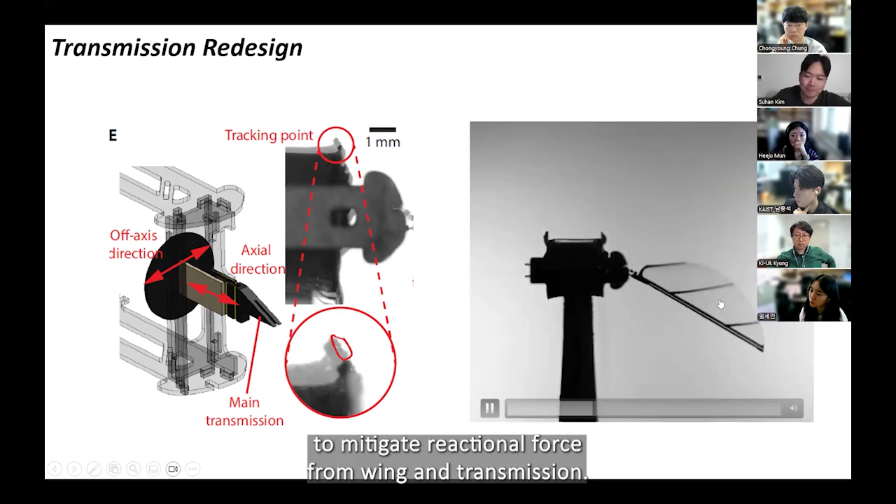The other thing is transmission. If you see this motion a little closer, the actuator is supposed to push and pull in the axial direction, but you're seeing a lot of up and down motion, tracked by this small red circle here. This is actually coming from the fact that the actuator was not able to mitigate the reactional force from the wing and transmission. So what we made instead is 2 guide transmissions that can apply counter stiffness to that off-axis motion.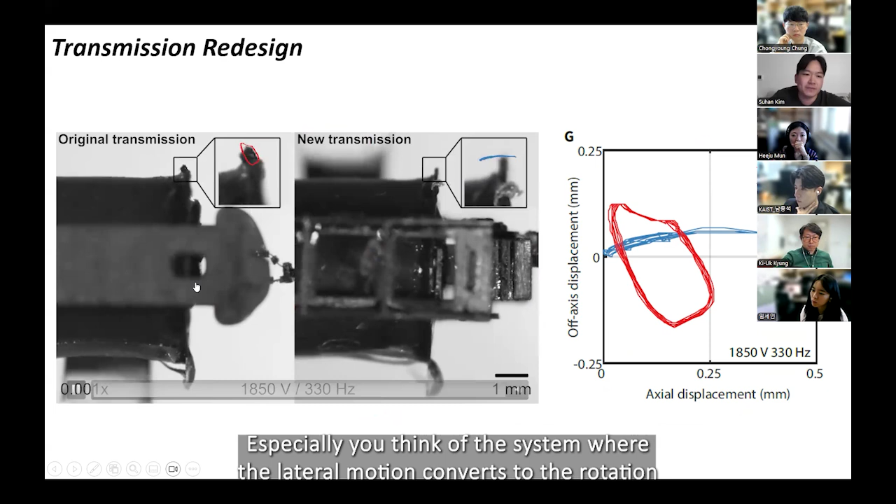At the end, if you compare the motion, you can see by putting in the guide transmissions, the actuator is moving much more linearly than the original case. Especially if you think of the system where the lateral motion converts to rotation, it actually obtains a lot of efficiency, especially in our flying robot system.

Combining all of that ended up being a 180 milligram robot unit. And then by combining 4 of them, we can construct a 750 milligram robot at the end.

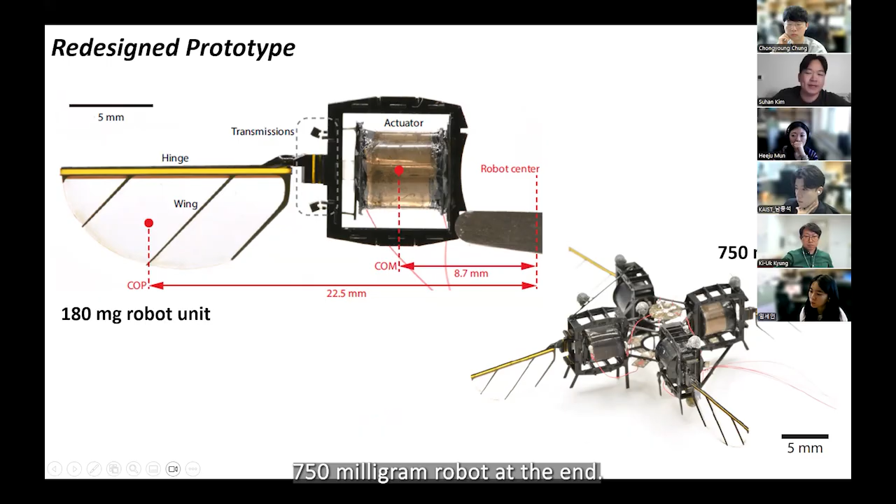So we do all the flapping kinematics tests. What we can see here is that our actuator has a natural frequency of kilohertz, but due to having wings and all the weight, the natural frequency of the system, the oscillation frequency, ended up being 300 hertz. But there's some compromise between flapping fast versus flapping large, so our flapping frequency ended up becoming a little larger than this 300 hertz, at 330 hertz.

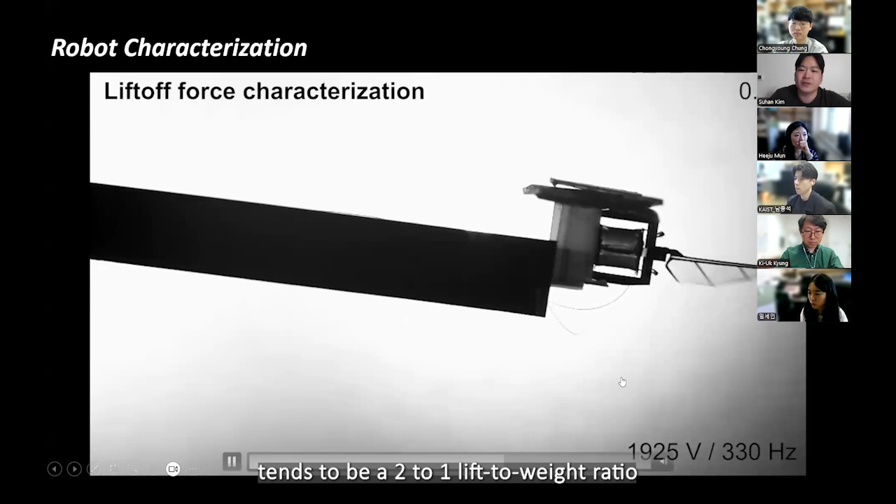This is the lift-off test, lifting off 360 milligrams with the 180 milligram robot, which tends to be a 2-to-1 lift weight ratio. And then we do a little bit of hinge stiffness characterization. We vary the hinge stiffness by varying the hinge joint structures, and we maximize the lift by having appropriate hinge stiffness. So this is hovering flight for the new robot.

Right now, what you're seeing is hovering flight for 1,000 seconds, which is basically 2 orders of magnitude increased from the previous robot, around 20 to 40 seconds. This is due to all the small parts improvements, and we got a huge increase in our flight time.

This is a demonstration. As I mentioned before, if we can do hovering, we can do whatever trajectory we want in 3D space. This is following the trajectory of MIT pretty closely. And this is basically a demonstration where we can really just command whichever trajectory we want and get it to the set point.

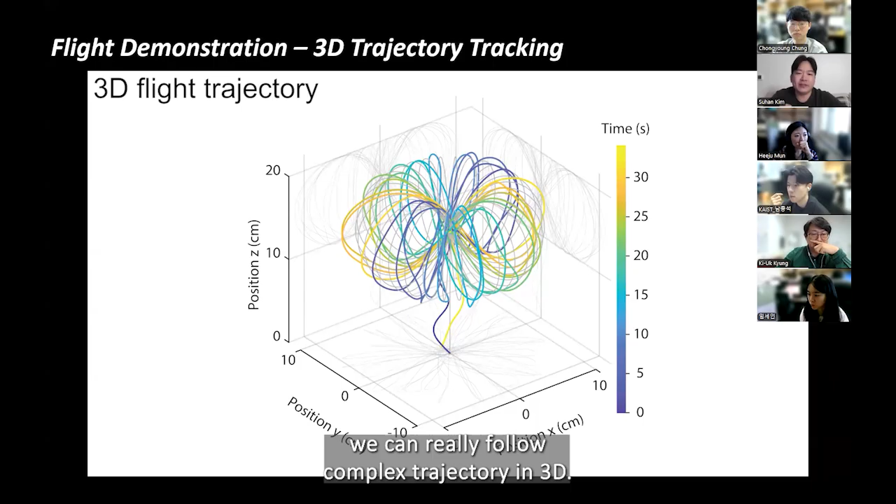Even more so, we can really follow complex trajectories in 3D. I don't know if you can hear the sound, but this is actually how our robot sounds like during its flight. Right now it's following a pretty complex 3D trajectory, which is widely used in drones for trajectory following characterization as well.

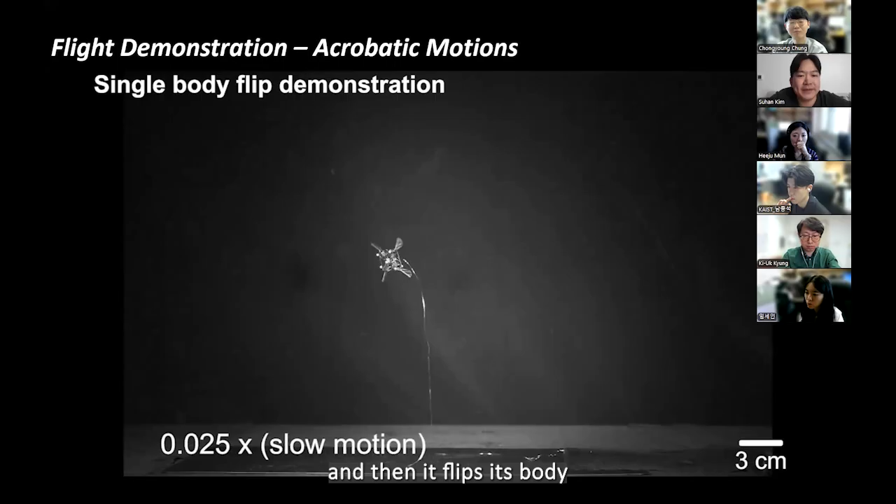And I'd like to show this video doing a flip. I mean, this is real time - you can almost see nothing from the real time footage. But if you take a look at the slow motion video, what the robot actually does here is it first ascends, then flips its body in the air, stabilizes, and then comes back to the original position.

So this is very acrobatic motion, very unique compared to commercial drones. Commercial drones almost cannot do this, or it's very, very hard to achieve these motions. For us, we have to mention that we were able to do this before as well with our previous robot design. If you see this video, this is doing the same flip, ascend, and flip.

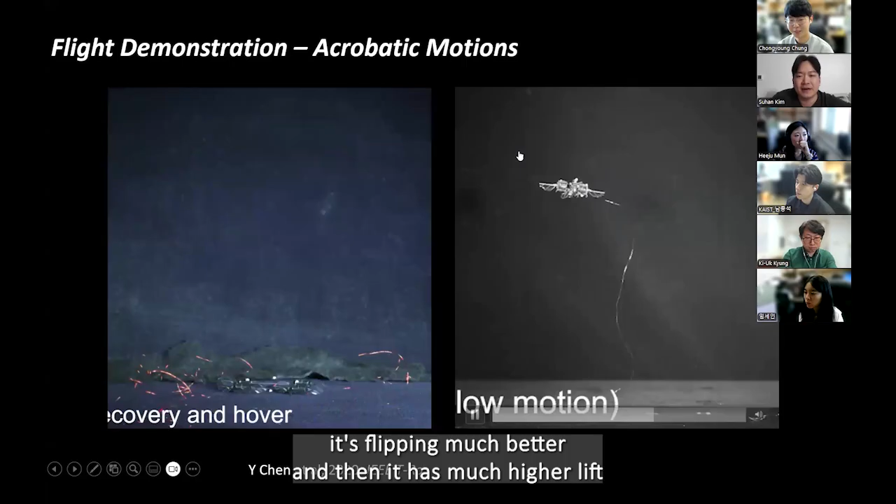What actually happened with this robot was that it didn't have enough thrust, so it was not able to mitigate its thrust loss during the flip, and then it had to bounce off from the ground. Whereas if you watch our new robot flip again, it's flipping much better, and it has much higher lift so it can balance itself, not bouncing off from the ground.

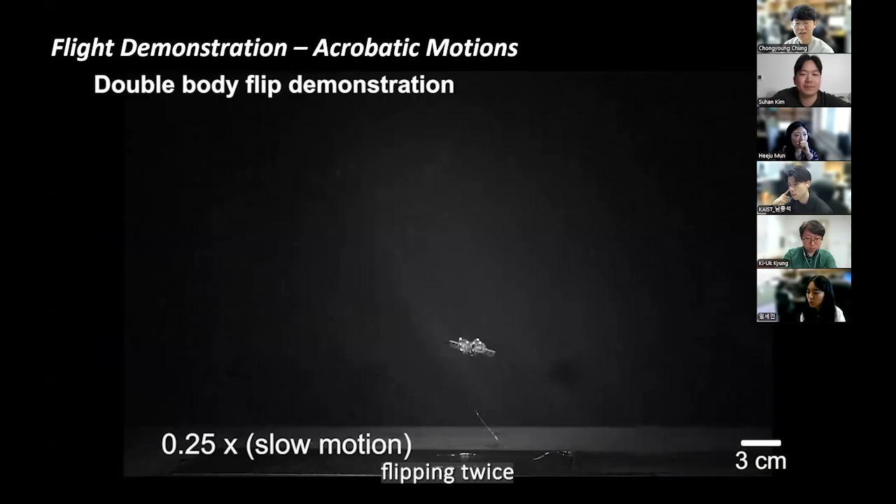Even more so, we can also demonstrate a double flip, which is really rare in the drone world. In real time you can't really see much, but if you go to slow-mo, you can see the robot flipping twice in the air, but it can still stabilize without bouncing off from the ground, and then comes back to its original position.

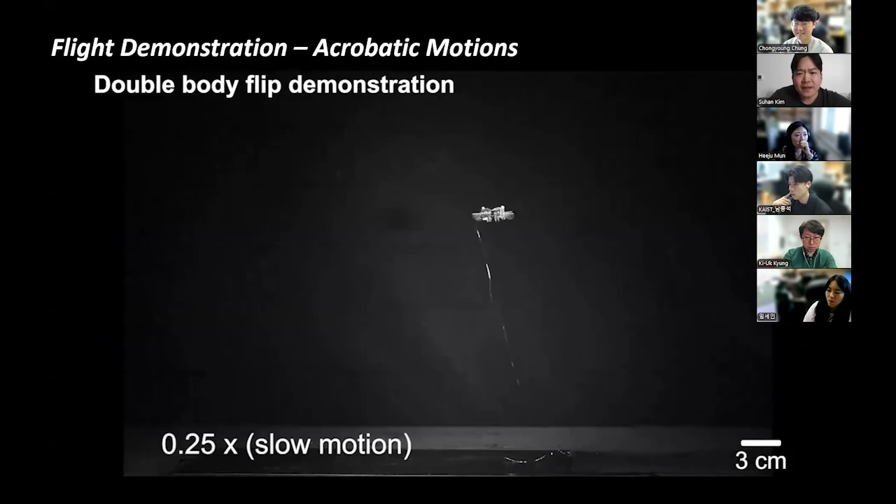If we back-calculate our rotating speed, this is our work during the double flip. We compared the results of the flip with the flipping speed of existing aerial robots plus natural insects, and we figured out that our robot was actually faster than any of the insects in nature.

So to summarize, we reduced the number of wings by 4, the max flight time increased by a factor of about 2, and the rotation speed was also increased by 4 times for the new design.

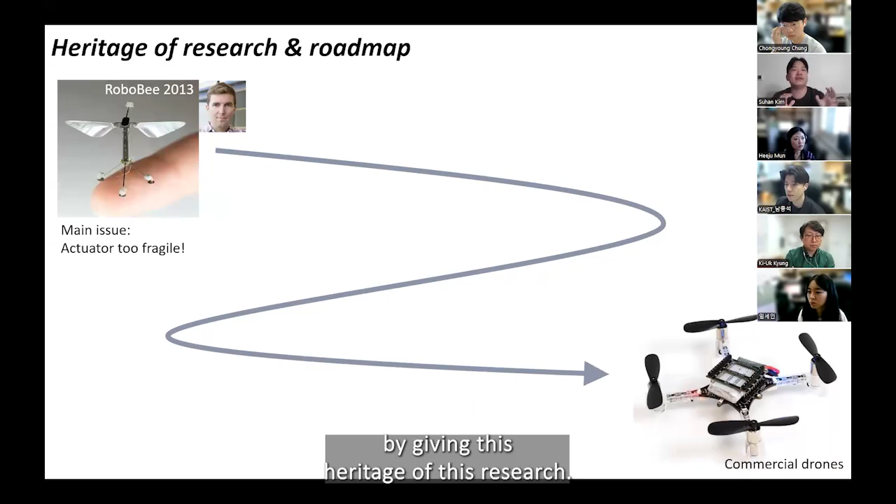This is part of the summary, which I'd like to give by presenting the heritage of this research. The breakthrough happened in 2013, when this robot achieved controlled flight for the first time. But the issue here was the actuator being too fragile.

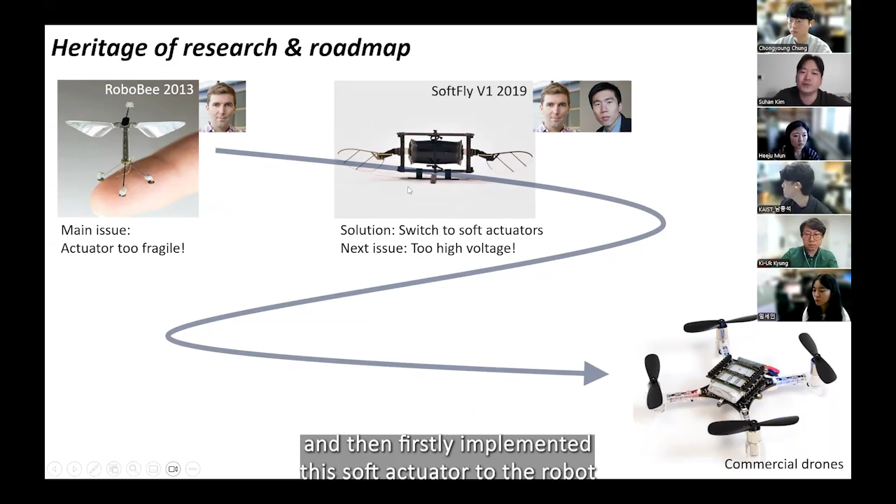This is Professor Robert Wood at Harvard, and this is my advisor, Kevin Chen at MIT, back then a PhD student. They first implemented the soft actuator in the robot to make it more resilient to damage.

But we still started facing the issue of voltage requirements being too high. So as I joined the group, I started working on lowering the voltage, which I brought down to around 600 volts, and it's now around 400 to 500 volts.

And then we faced the next issue of structural lifetime being limited, and the new design has overcome that issue.

The rest of the effort we made was really to put all the power system and sensing system on top of the robot, and then make the robot able to support that whole payload.

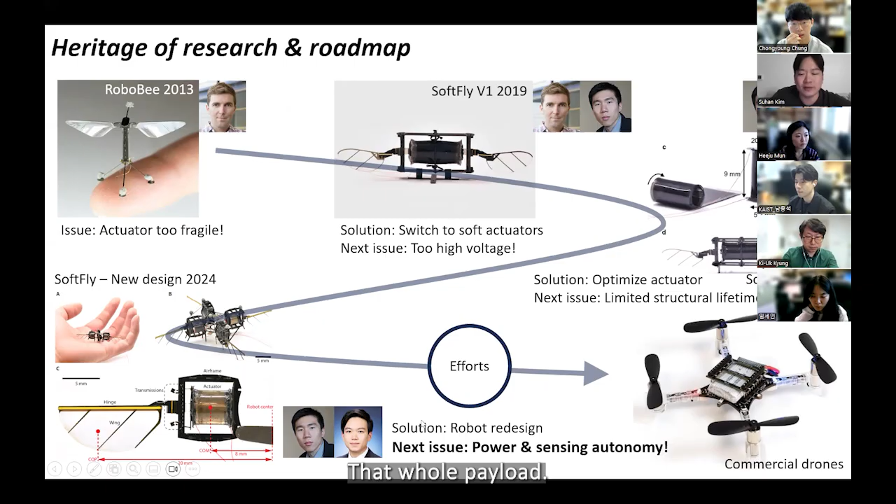So this is the short future outlook. We envision a lot of applications for small flying robots, such as artificial pollination, natural monitoring, or search and rescue missions. In terms of academia, since we're working on many different aspects of our robot, we hope to collaborate with researchers in the fields of sensors, material science, aerodynamics, mechanical design, and advanced controls.

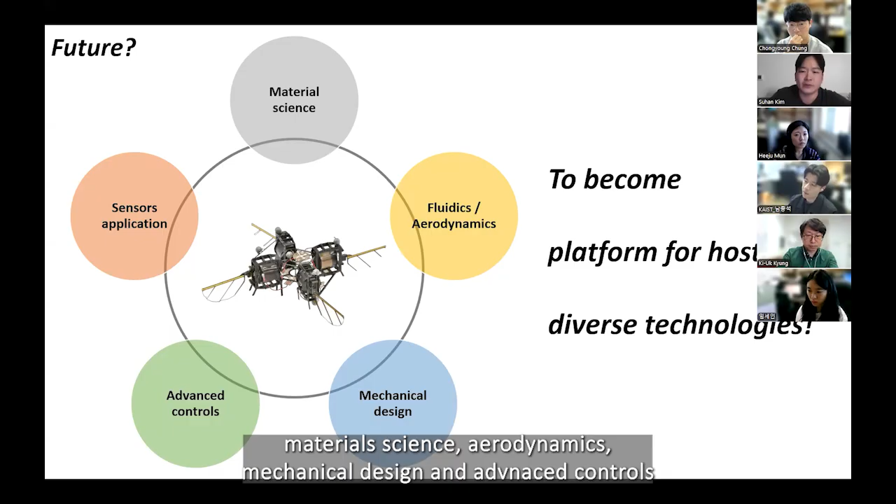I would like to thank my professor and all my friends. Today's presentation summarized mainly three papers. If you want more details, you can look at those three papers later. Thank you for listening.